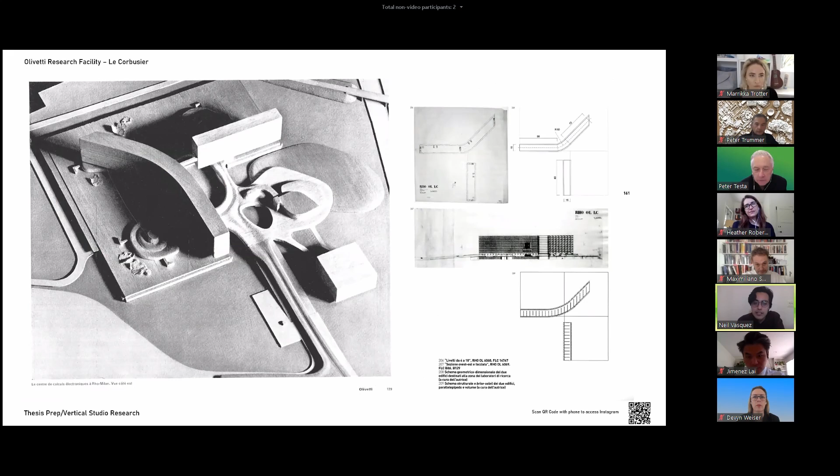So now I'll take you through that early research to see how these objects and the idea developed. My thesis prep begins by appropriating assets and strategies from my fall vertical studio project, produced alongside my partner Jesse Gates, for a new Olivetti research facility. The assets we used were from Le Corbusier's design for the Olivetti factory in Milan, and by using techniques of translation, rotation, and transformation, it allowed us to produce new ways of re-seeing Corb's project.

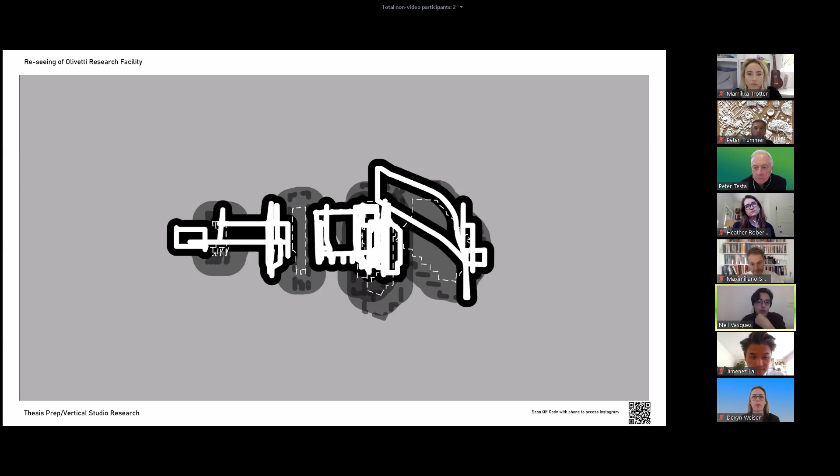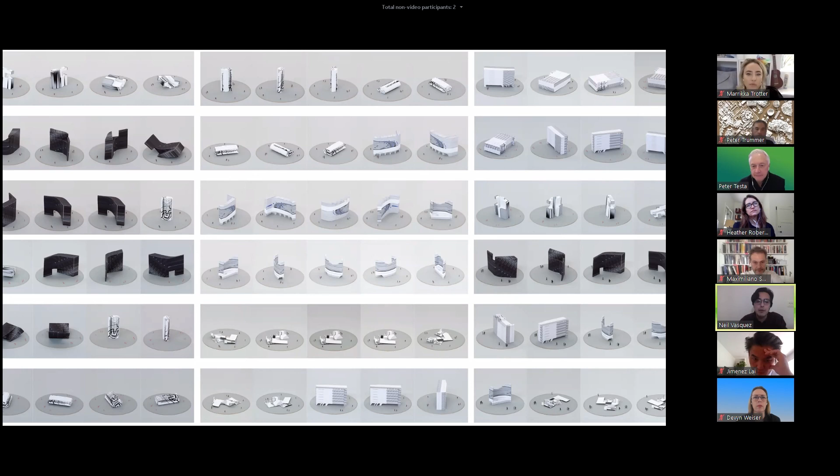Using these methods, we were able to produce images which we began to unpack and develop into individual objects. Within the objects derived from the initial unpacking, they came in many possible orientations and configurations. However, we ultimately chose only a few we wanted to develop further.

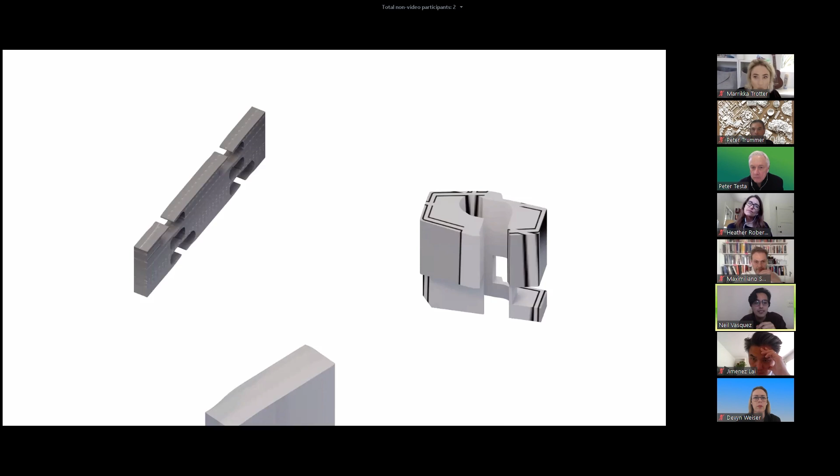So now these objects that exist without orientation, autonomous to their surroundings, are really placed close and in relation to one another, undermining the autonomy of each of them as they form an arrangement on site.

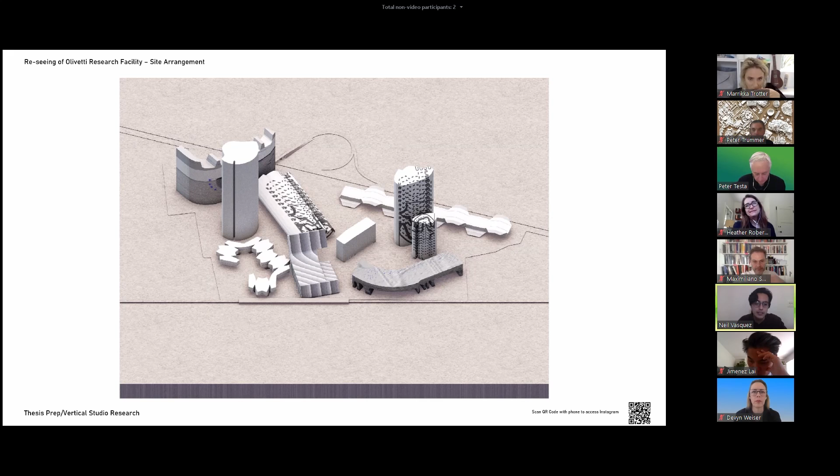Once we developed these objects, we then experimented with wireframe drawings where they could begin to imply structure or facade or interior. These objects tended to be only seen in the exterior, so the wireframe allowed us a way into the objects in order to develop an interiority.

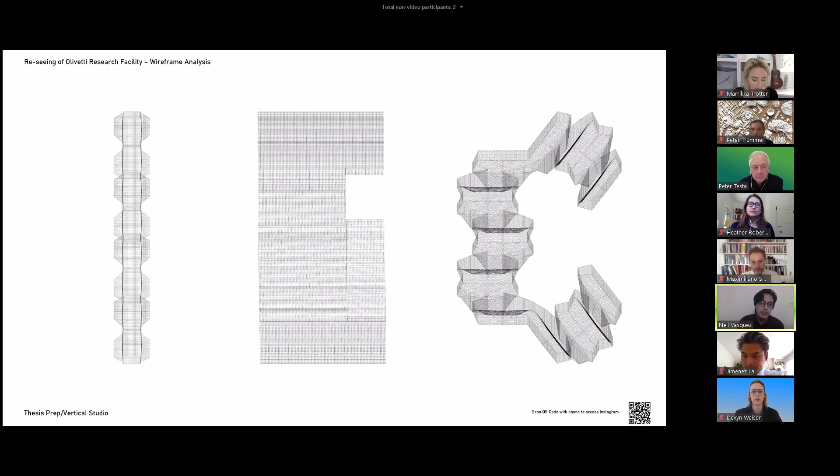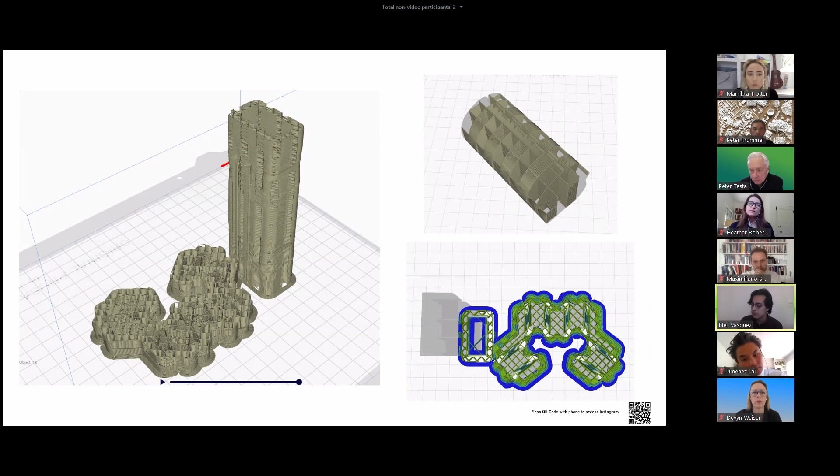So where the wireframes were one way to develop these objects, we also found a technique to see them once more through the use of 3D printing and the 3D printer, but more importantly, the misuse of the 3D printer and the 3D printer software, i.e. the Cura slicer.

So now going into thesis, I decided to bring some of these objects along with me as new assets for a whole new site at a different scale with a different program. These objects arrived to the site as foreign entities.

However, like the previous project, these objects, once placed in their site, are no longer completely autonomous. Rather, they enter into a quasi-autonomous state where they must reconfigure and retrofit aspects of themselves to meet the demands of the project. They are arranged in relation to the site and according to their proximity to one another.

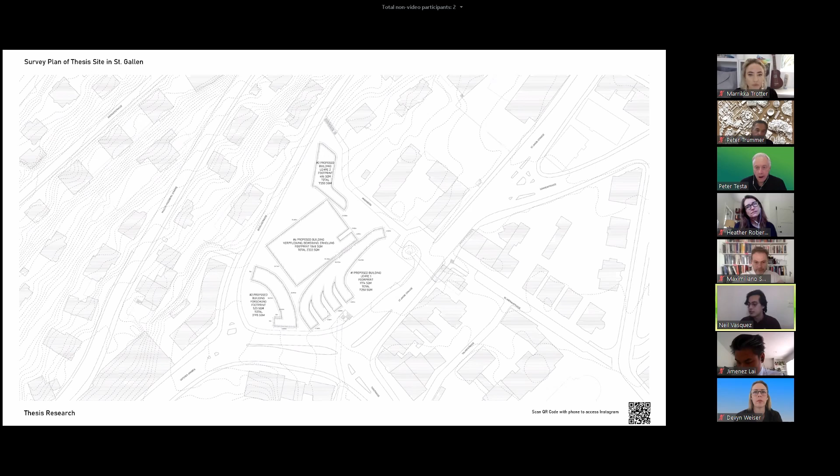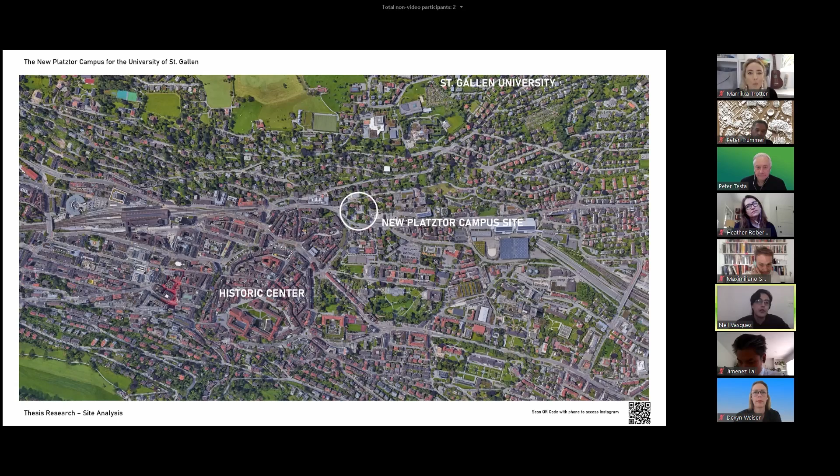The project and site is a campus extension for the University of St. Gallen in St. Gallen, Switzerland, between the Historic Center to the south and the university to the north. The program size requirements for the site are a total of 17,500 square meters.

The site has other buildings within it. However, the project guidelines do not consider any of the buildings as historically important and allow me to take a tabula rasa style approach to the site. This also grants me the opportunity to form a new relationship to the urban fabric of the city. The site is in this case not entirely urban and not completely singular either.

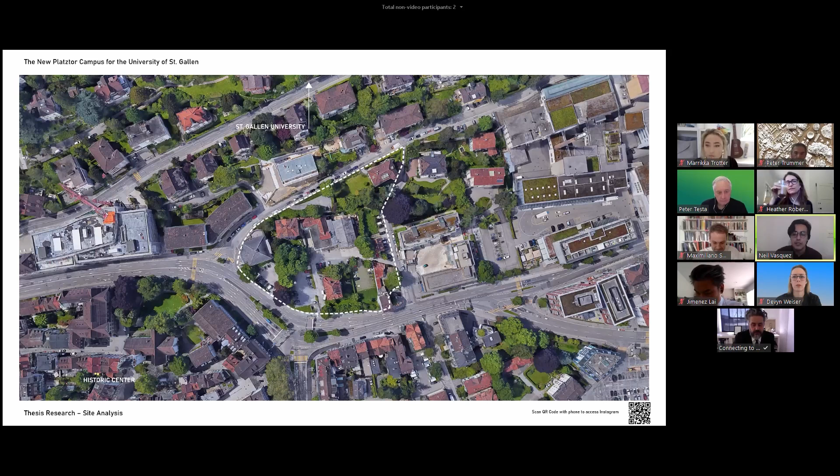So in the site plan, we can see the arrangement of 4 buildings placed uncomfortably close together. The 4 buildings are the research facility to the west, the recreational facility in the middle, the teaching facility in the east, and the administration facility to the north.

The organization of the building is tied to 2 major streets that separate the site from the historic center. However, there are 2 underground pedestrian entries or portals into the site on the southern edge, connecting to the historic center, and on the eastern edge, connecting to Stadtpark and the town hall.

These entry points press up against the perimeter of the site, further pushing the buildings uncomfortably close together and further undermining their initial autonomy. So by pushing these buildings up together, they produce these moments of abducted space between the project site and the city.

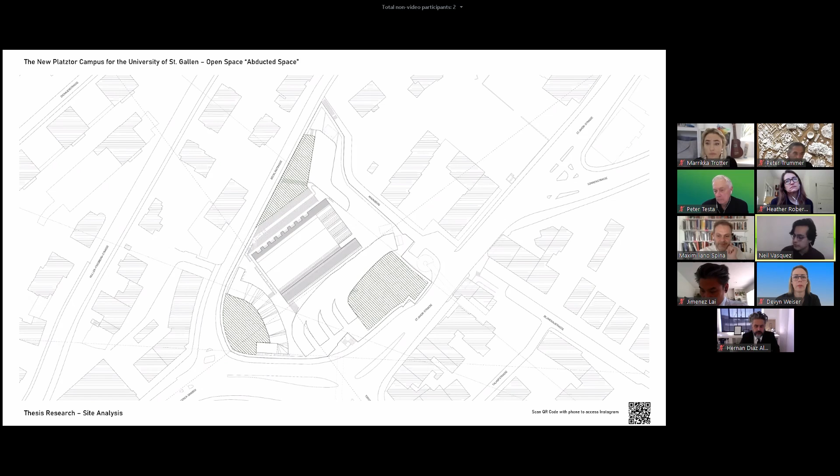And so here I'm using an approach to urban autonomy drawn from Alvaro Siza's Cottbusser Dam project in Berlin, where the buildings register as both an assembly of individuals and are unified within a perimeter block.

Can I interrupt? Sorry, Hernan is texting me. He needs in, Peter. Sorry. Oh. I mean, okay, all right.

Okay, great, so I'll just start from this plan here.

So when we finally arrive at the ground plan, we see that the individual quality of the building seen from above becomes much more fuzzy. Here, the quasi-autonomous objects can become one through the collection of the many. Their difference is not a means to create individuality, rather the individuality is united in plan.

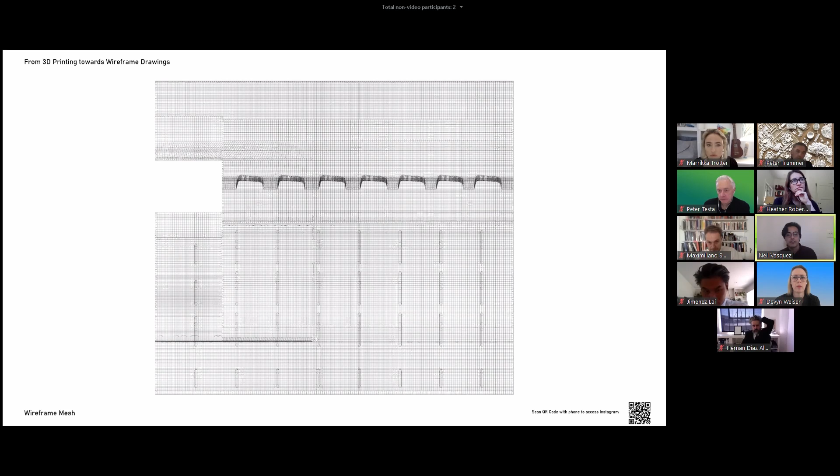Coming back to methods of reseeing objects through the use of 3D printing, the language we began to develop through the misuse of 3D printer software was similar to the wireframe drawings in that they began to imply a texture, interiority, formal articulation, facade, etc. So by extracting that information that tells the 3D printer what to print, i.e. the G code, I'm able to develop these textures in a more controlled way.

Here we can see an idea for a form of facade treatment. This in turn allows me to reread and develop the objects further.

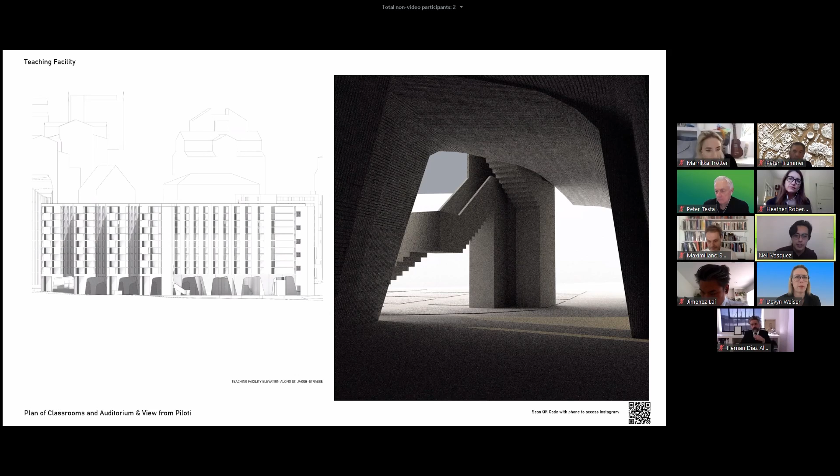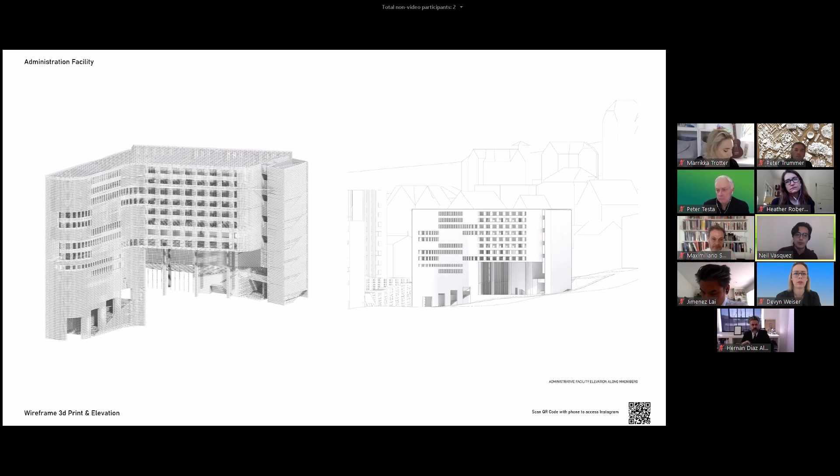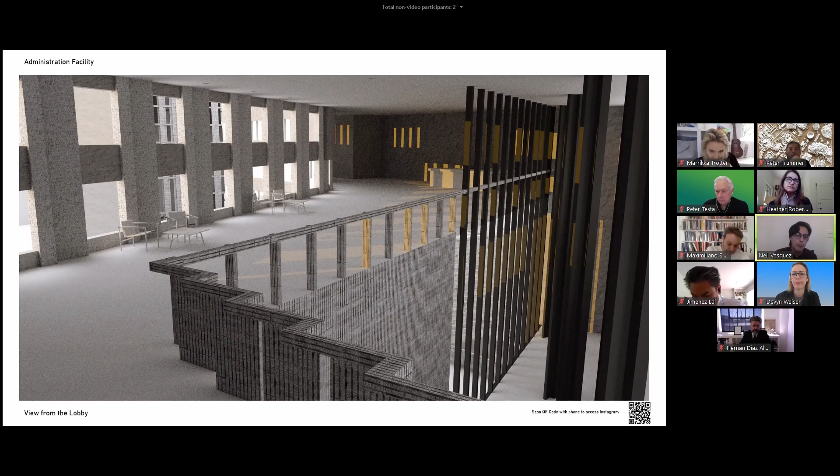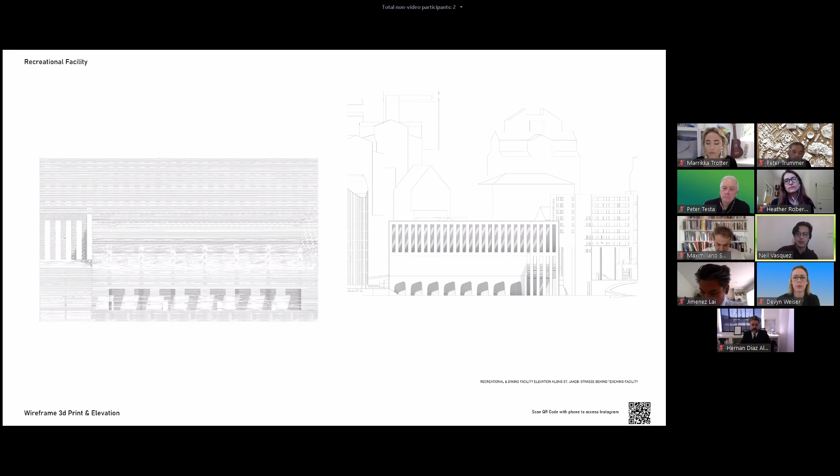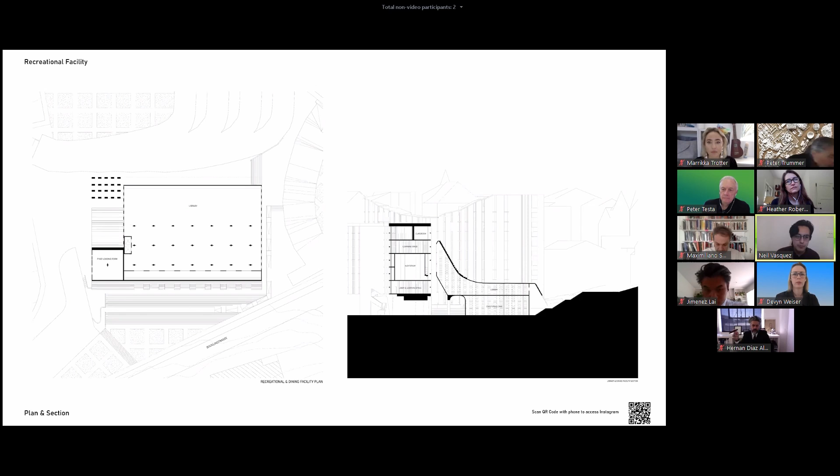Moving along to the recreational building, containing both a library at the second floor and a cafeteria and cafe at the ground floor level, because of this constant coming and going, the abundance of multiple entrances on both sides of the building facilitate this flowing environment. On the right in the section, we can see the proximity of the two buildings, being the recreational and the teaching facility, and the way that they almost touch each other but don't. Here we see a view from the second floor library.

Lastly, we arrive at the research facility, the tallest building on the campus, and the design of the facade itself zigzags between both sides of the building, allowing for an even 50-50 wall to opening ratio. In plan, we can see the partitioning of the rooms as well as the zigzagging quality of the facade informing the design of the rooms, while the section is able to carry a more repetitive nature, with the workstations at the bottom portion and the office archival space up top.

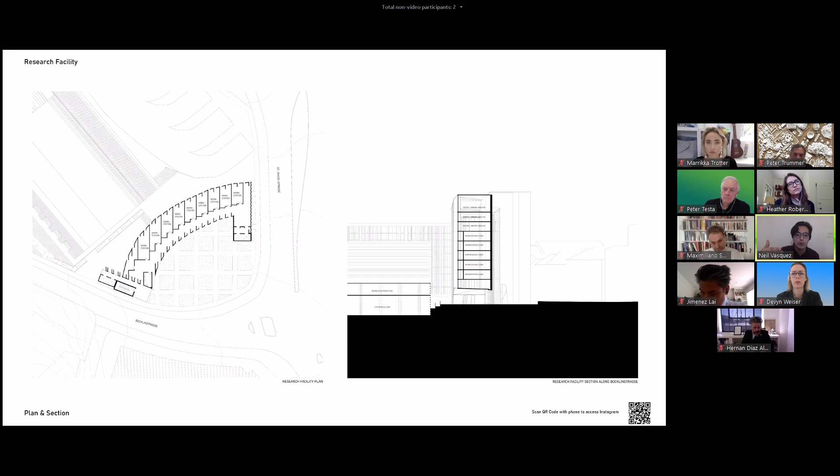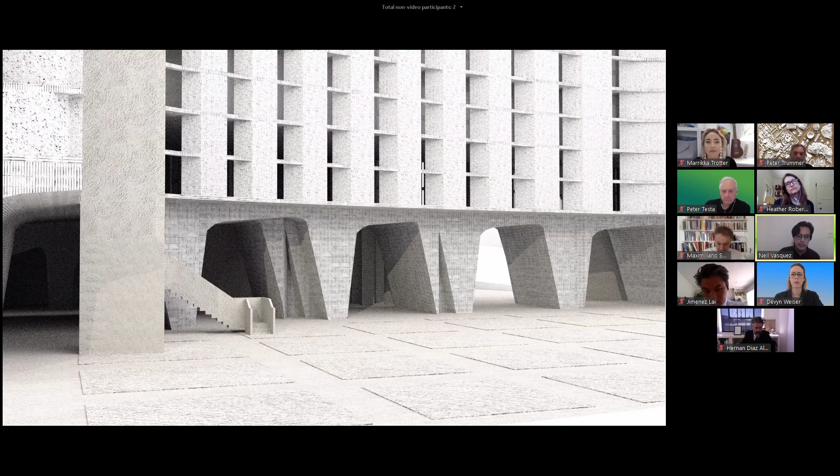So finally, the following slides show the configuration of the buildings together. Here's a view from entering the canyon to the side. View again of the teaching facility's piloti and egress stair. And finally, a view of the administration facility looking towards the campus.

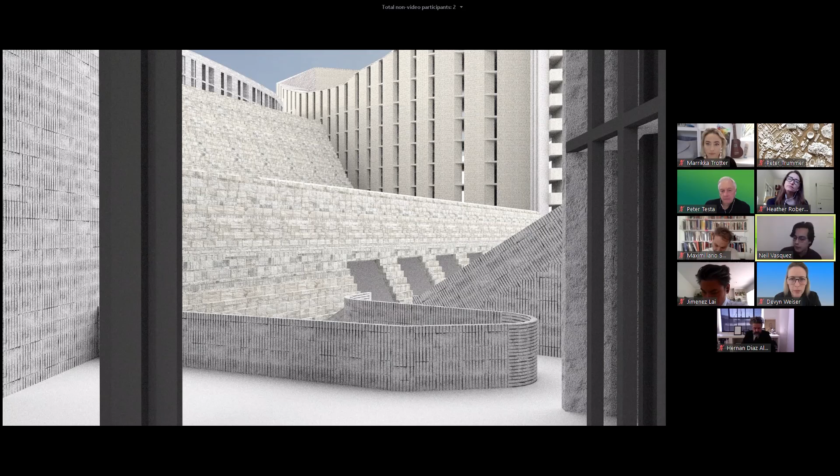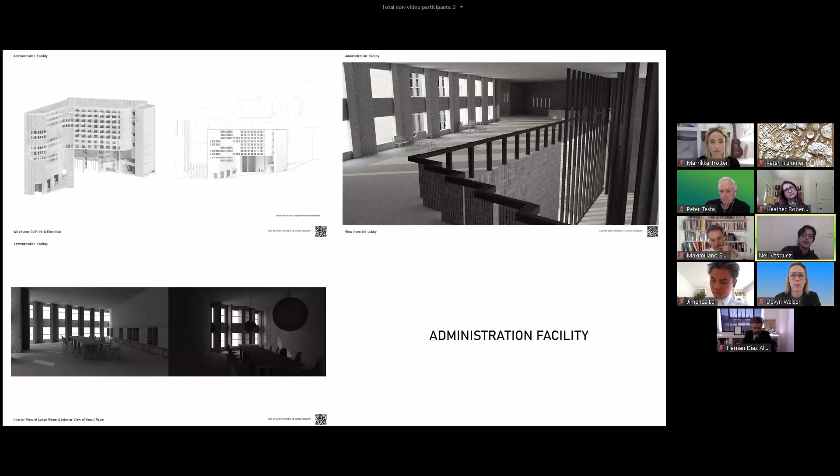The project ends with the idea that by sourcing and reformatting information in a new context through new methods and means, something new can be proposed, and that individuality and autonomy are not separate to a form of collectivism and unity, that their qualities can be brought together and enhanced at the ground floor through the ways that they frame each other. I'll just leave this final scene here to get the conversation started. Thank you.

Perhaps I'll just have an interesting first comment. The first time, I think there's an interesting thesis about whatever the idea of the machine learning perspective could mean to making a plan. But when I saw the plan, what I found interesting is I've seen cartoon plans, I've seen plans taken from paintings as a collage, you've seen functionalist plans, but what I found interesting is I haven't seen a tool plan. You know what I mean? Basically, the layout of the objects on the site has a logic that doesn't come from architecture, but comes from a kind of a...

A tool assemblage, you know. And so I found it a very strange reading of your plan, even when it was a completely urban project. But I would suddenly look at it as if the arrangement comes from a distribution of a game, or how to say, like, how do you distribute the most amount of objects onto a site? It doesn't have a logic between the parts, it just has a logic of placement, and so it produces a very strange in-between space.

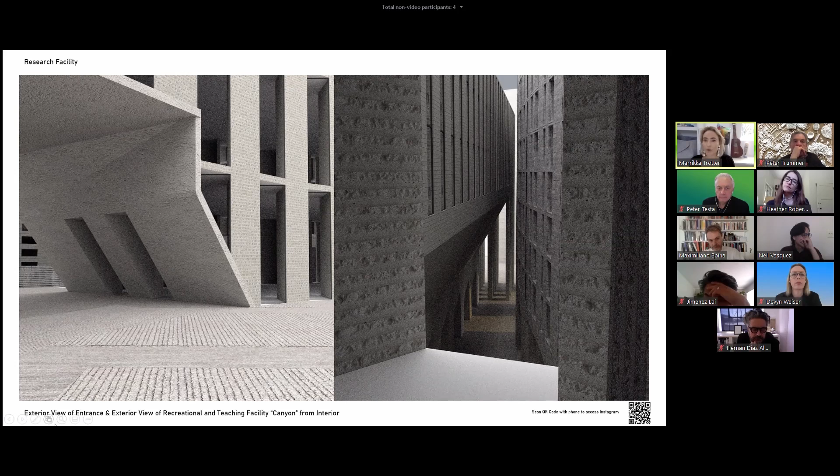I see the drag of conservatism in the end of this project with the way the interiors are rendered. We've talked about this before, but also as others have mentioned, in the materiality of the project overall, and in the loss of that beautiful flickering meshwork that seems inherent in translating something that is a filament and a line into a mass, a volume, and an enclosure. It's just not where we are today.

To bring this project back to a cast concrete or masonry monolithic structure with applied texture is, I think, a true loss, and one that I want you to jettison as you move forward with this very exciting project.

Fully agree, Marikka. I'm just dying to build this in composites. It is just 100% to be woven, to be lightweight, to be kind of unusual in its tectonic resolution, where maybe it looks like a mass, but it's actually much more lightweight. There's a huge opportunity for that.

Well, I think these are all really on the mark, but I think it ties back to Maxie's point about the line as well. The filament is the way to take the line through into construction and into form. So I think that's a next level development or thought process, and I agree that there's a kind of drag back into the known.

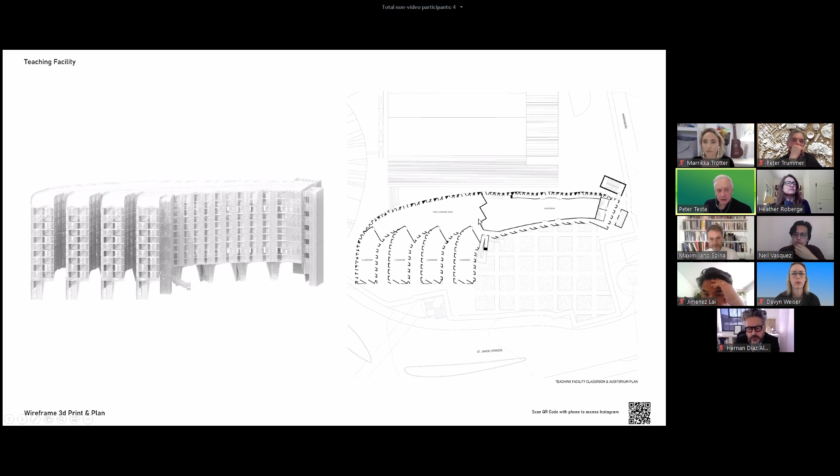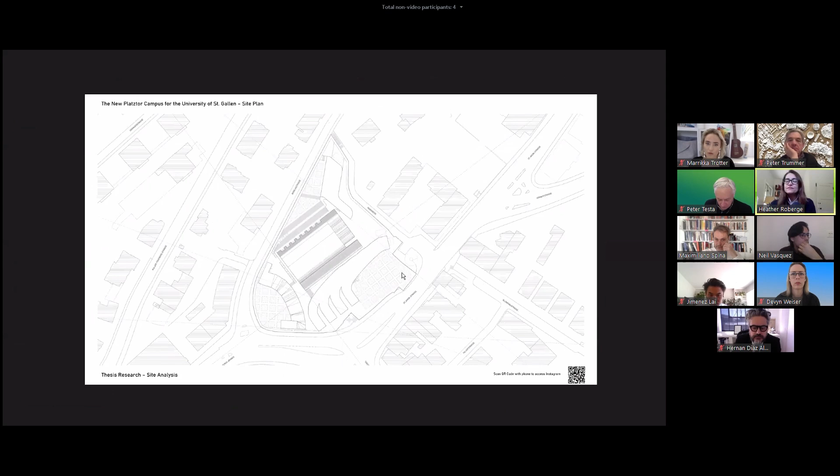I was going to comment on the decision that was made that lends the material translation its conservatism. I think that's a deferral to the contours of habitation in the interior of the building. So you are thinking about the upright occupant, the vertical window, and the horizontal slab, and those kind of spatial slices supersede the translation of the G-code.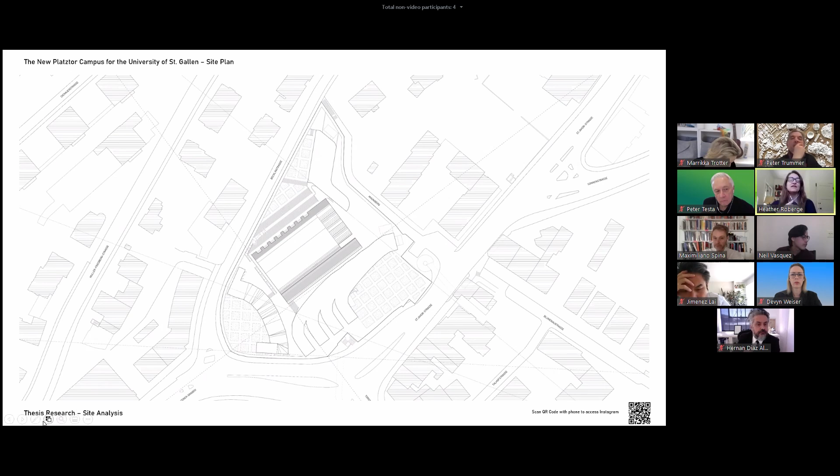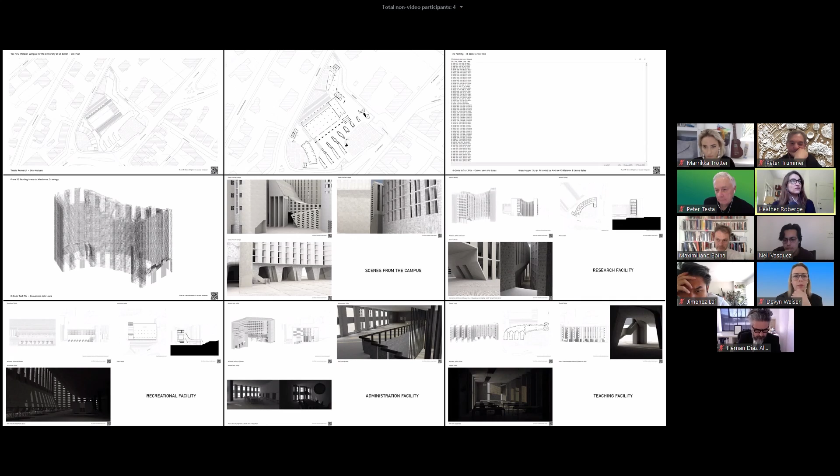So you basically make the building defer to that kind of habitation slice, and that jettisons in its translation all of the unusual lines of force that happen in the 3D printed models. So I think the conservatism is in thinking about the way the envelope works as an X-ray to reveal the spatial contours and inhabitants of an interior.

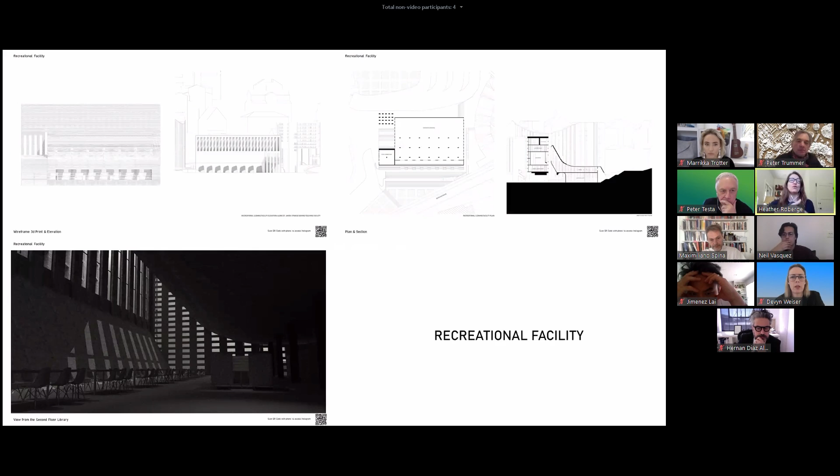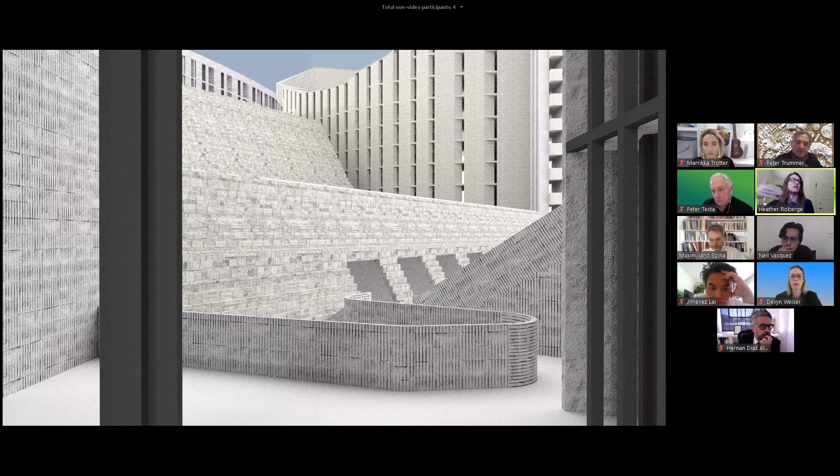If you thought about this envelope that kind of involutes or folds into the interior as something that doesn't have to be vertical or perpendicular to a floor plate, then I think it would open up the modes of translation, both for things like aperture and for the rhythms of facade making that you explore in the project.

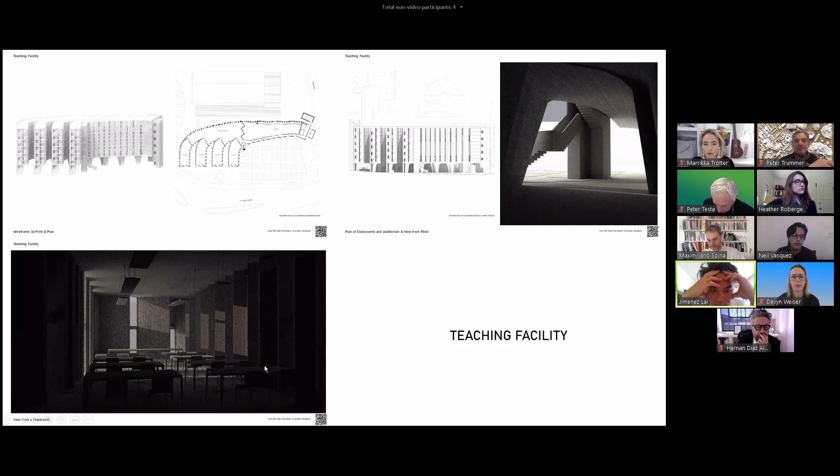Yeah, I want to join this discussion, talking a bit about the strengths and weaknesses of 3D printing something versus pouring something.

The idea of pouring something—let's use two concrete masters in the recent past, Tadao Ando, for example, and Ensamble from Spain. I think these are two very different types of masters of concrete, but in both cases, the residue of the pour is really important to their work. For Ando, the residue of the formwork is almost as important as a texture as anything else. And for Ensamble, this Spanish group, the texture or residue of, I guess, nature as the formwork is kind of important to them.

But in your case, what is, for the Andos of the world, easy—achieving a sharp corner—is easy, but to achieve a smooth curve takes a little more work. In the case of something that's 3D printed, as Heather was talking about, some of the advantages of the types of line work you're able to achieve—I think you're sort of not fully exploiting your advantages with the means that you're choosing.

The other thing I'll say is, I'm in total agreement with the comments. I don't really know—I think it's maybe uncomfortable for you to hear about conservatism as a description, but I do think you're not maximizing your means.

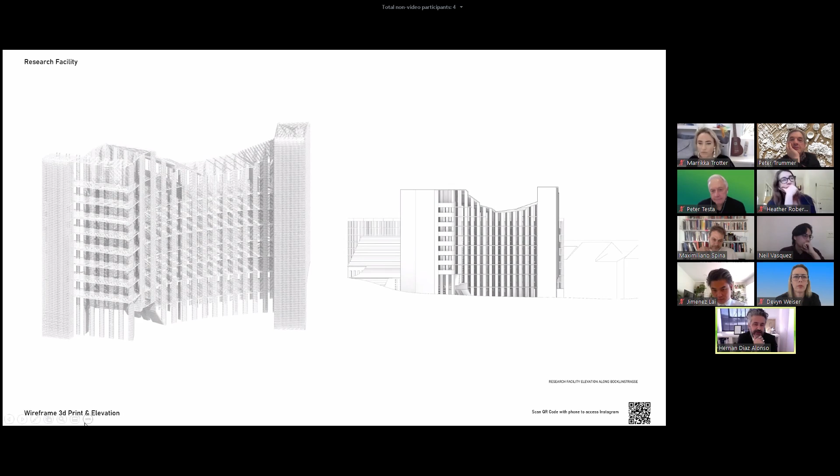So I think there are moments in your thesis that point more to that, and maybe that has to do with the models and the 3D print. It's fascinating, for example, the plan to me, because it's fairly clumsy. There's something really interesting about the idea of something done through a machine that has a certain clumsiness. So there's something there in that in-betweenness, which I will read as a thesis in itself. Sometimes the project is just a platform for a thesis, so I find your project potentially very exciting.

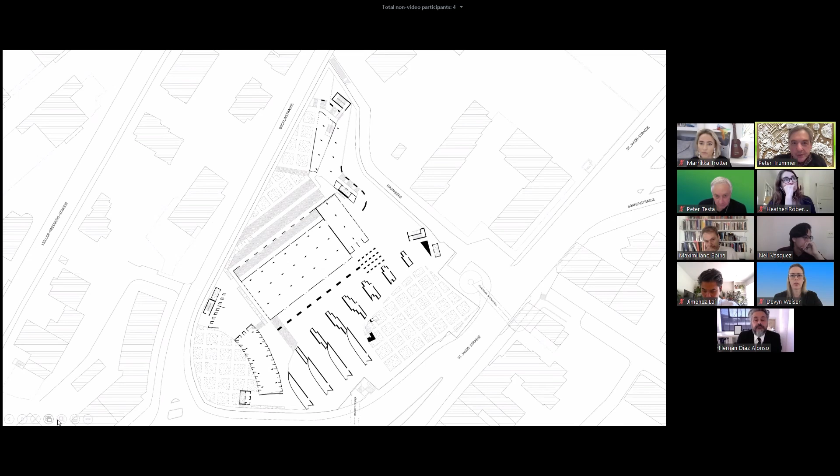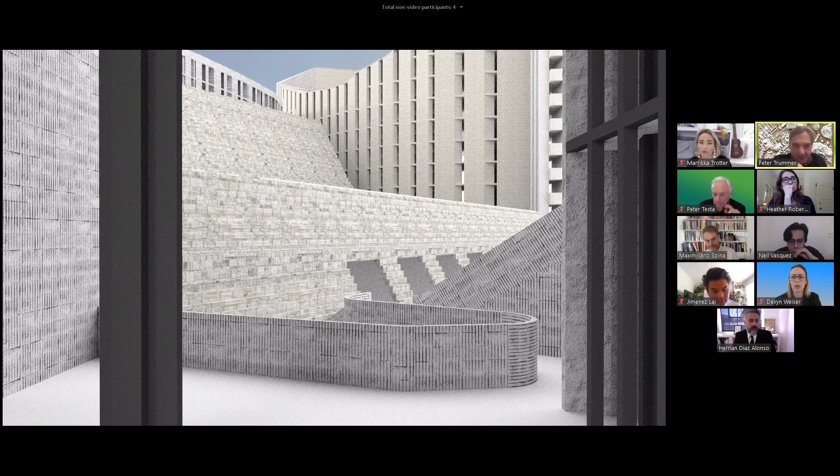I also want to add one last comment. I like this idea that you force a material into something that doesn't actually belong. Even when we all see in the renderings kind of, I don't know, Rudolph's brutalism, or bricklaying qualities, I would like to read it as 3D printing concrete, just making it look as if it is poured concrete. I could imagine that even what it looks like is not what it actually is, but comes from a 3D concrete printer.

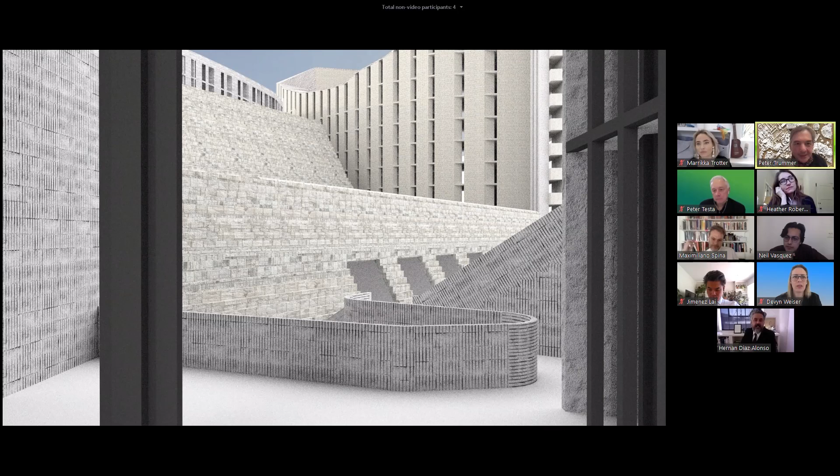So I know the comments, I totally agree with this, but I like this idea. It fits in my category because I have no idea about materiality and colors. I always thought architects make just some stuff and then other people throw it into matter. But I think this is what I would like to see, because sometimes there are details coming out that make tectonically no sense. These little moments where they mismatch the tectonics with the geometry, I thought you could read it as another concrete processing material, printing, instead of molding or precasting or whatever.

I think you're right, Peter, to point that out. I like what Hernan is calling, and I think Hernan likes it as well, the clumsiness of the plan, exactly as you said, laid out as if it were a kind of tool kit rather than a piece of architecture. If you were going to actually run through what it would be like to 3D print the building, and then have these moments where suddenly that was revealed in a kind of unlikely mismatch of materiality or pattern, done with the same abandon and virtuosity as the plan, just sticking all these things as close as we can one to another, then I think you'd be actually exploiting your own process, Neil, to the fullest potential.

But I think it's an incredibly generous read. I don't want you to think that you've done it yet, because it's such a rich process. It's such a cool project. You've gone so far with it. And then I think the retreat, as Heather was saying, to the known slab, window, structure, stair, interiors, the relentlessness of the punched openings, all at the size of the human, et cetera, is something I think you need to overcome going forward.

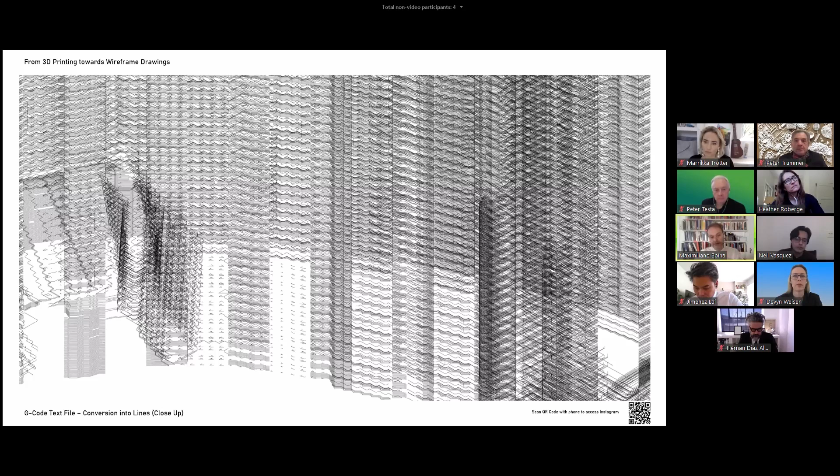the tool path, and the extruder, and this idea of objects coming together in a kind of small urbanism of objects—this idea that the machine doesn't necessarily print just the object itself, but also prints the kind of support around it that one needs to excavate in a way. And sometimes produces, as objects come in proximity to each other, this kind of bonding, this kind of rasterizing of the line that begins to join things in proximity. So to me, that idea of freeing architecture from its material trappings is something super interesting.

Goes back to Michelangelo and his unfinished sculptures—these sculptures of man trapped in the matter of the stone, in a way. To me, that seems really pertinent in this kind of project, and I wonder if that kind of support that shows proximity between things can begin to play a role in this kind of project as well.

I think that's a tremendous point that's embedded in this research program. And I think it links—it's probably the more interesting way, as you guys are describing it, to link this to the autonomy argument, or the quasi-autonomous aspect of the siting and organization of the objects in the site, that allows us to reconsider all of those exchanges and gives life to this kind of image that we're seeing on the screen right now.

So I don't want to bring this to a conclusion—we still have another 10 minutes or so for this discussion—but I just find this incredibly interesting relative to this thesis. Could I bring up something in terms of contrasting two modes of material production that might be interesting to think about?

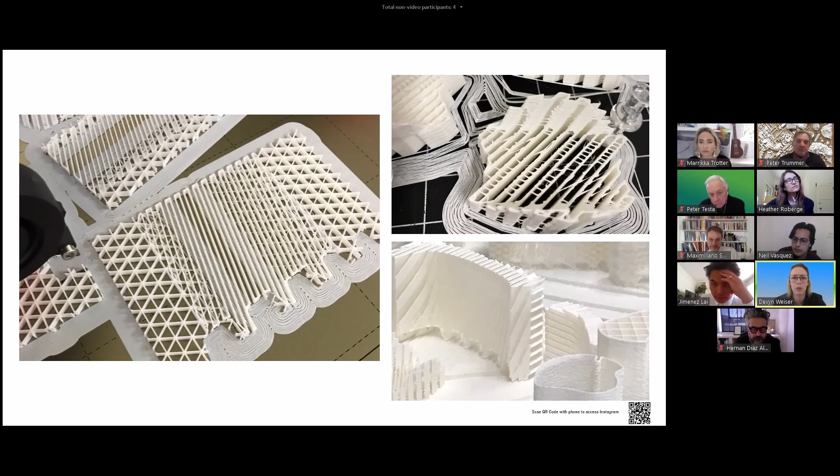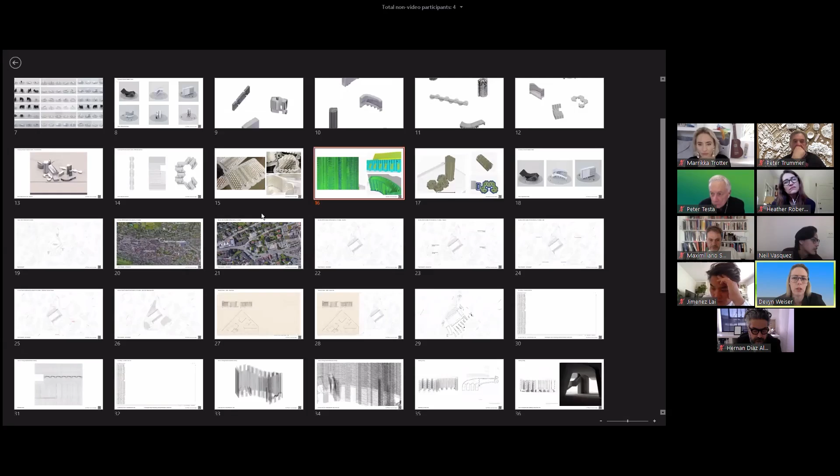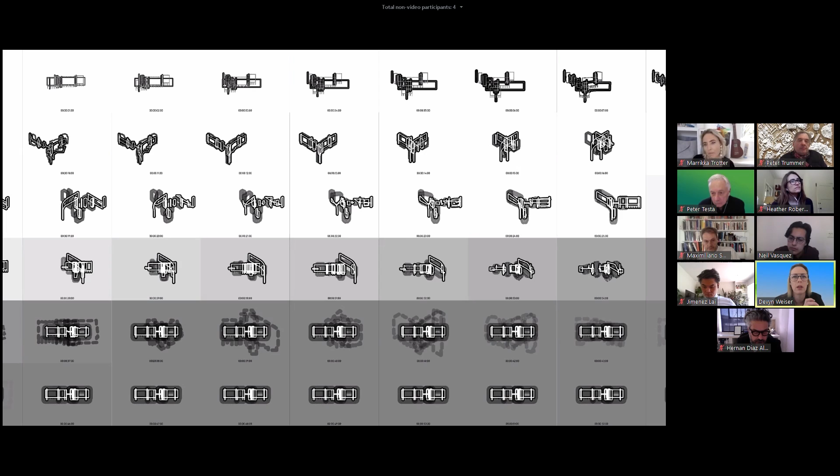I think we saw that in Nick and Dex as well, but the reading out of that for formal and representational projects we've seen is very successful. But now I just love how the conversation is reimagining that in a tectonic way. That's been one of the next steps I was hoping to see coming out of this graphic work.

So I think those are really great points. I'm taking notes—it's really important and well said. Thanks to Heather and him for those points.

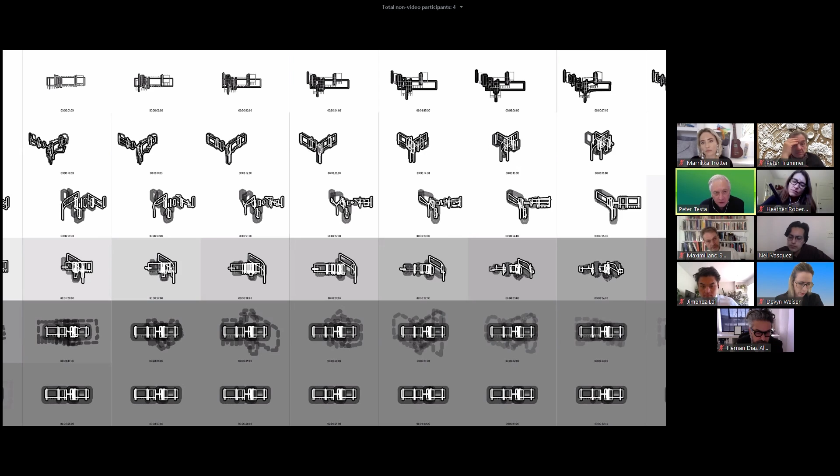So there are different tracks one could go through here, and I think they're all very relevant. But I really appreciate the addition of the kind of phygital or digital-physical weirdness that Hernan is also infusing into this discussion—I think that shouldn't slip by us either.

I really appreciate everyone's comments, especially ones that tie into that new materiality—seeing the kind of conservatism that was developed at the end of the project. Obviously, if there was more time, it could have developed in a different way.

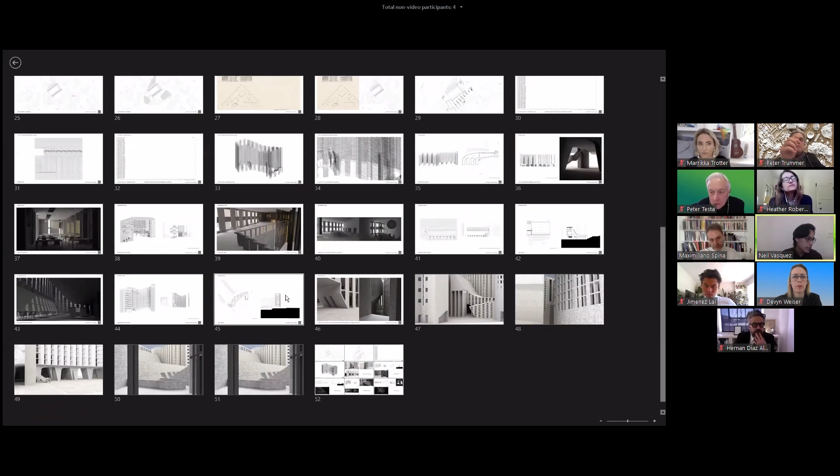So in this one view here in particular, most of the buildings at their center contain this band that breaks up that kind of human proportion. Here in particular you can see it—so when the upright vertical human is up, there's an actual blocking of you being able to see outside. So you actually have to look down and you have to look up, and you can't actually look directly in front of you.

And so in this kind of resampling of Le Corbusier and the modern project, I do want to be attentive to the issues of today while doing these things. So the conservatism was not a retreat back to conservatism in materiality, but it was a way for me to tie back to modernism in a certain way, using these new formal articulations, this new kind of curatorial development, in order to somehow move forward or re-see it in a certain way. So that's what I would say about that in particular.

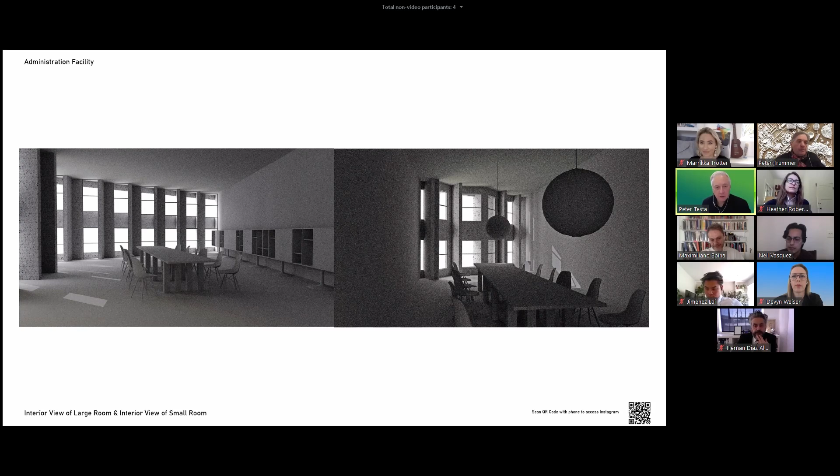Cool. Yeah, thank you. This is good work, Neil. Thank you, great stuff. Thank you. Awesome, really good discussion. Fantastic—you really gave us a lot to think about here, Neil. Super.